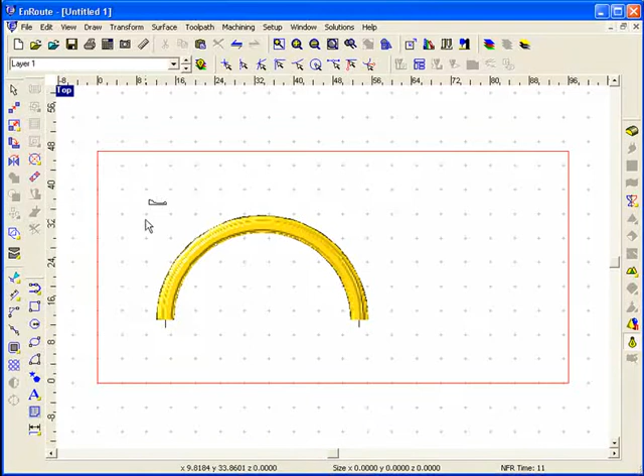In this movie, we're going to show how to toolpath the previously created molding. We're going to start off by getting rid of these 2D contours, which you don't need anymore. And we're going to take this relief and move it to the lower left-hand corner of the plate by hitting the Control button and the 1 from the number pad to the right of the keyboard.

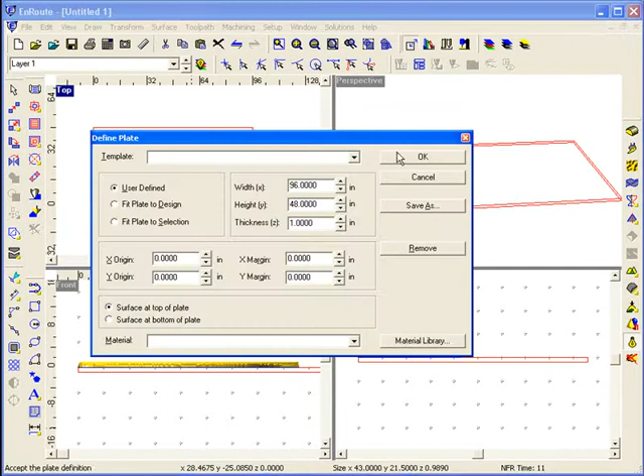When we created this relief, it was resting on top of the material, so I'll first of all select it and see that it's 0.9890 inches, and my material thickness has been set to 1 inch, so I know this relief will fit inside the plate. I'm going to come here to the Align Reliefs tool and move it inside the plate.

Now I'll create a toolpath, and because there's a little bit of material here to be removed, I'm going to do two different toolpaths. One will be a rough pass, and the other will create the actual surface. In both cases, I'm going to use the Island Fill toolpath because they'll be more efficient.

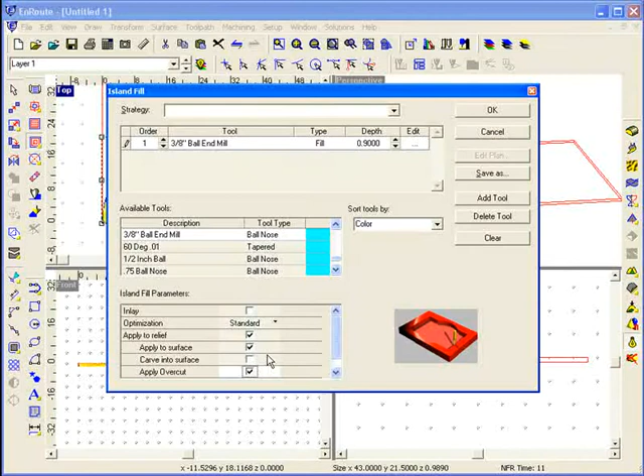I'm going to come here and select the tool I want to use, and in this case I'll use a 3/8 inch end mill, or I could use a 3/8 inch ball nose tool as well. I might use a ball nose tool in this place. So we'll choose a 3/8 ball end mill, and we'll put a depth of 0.9 inches. So we're not going quite all the way to the bottom of the material, and we'll do an overcut here and allow this to travel 0.2 inches past the edge of the part.

I'll also decide the overlap and the feed rates here by assigning these values, and we'll keep this an overlap of 50 and assign a feed rate of 300 inches per minute. Now I can hit the OK button, and we'll see that this toolpath is going to be created.

Now I might want to do a little bit more detailed tool with a higher overlap to give a little better overall appearance. So this time I'm going to choose a little smaller tool, a 3/16 tool, and I will go all the way down to the desired depth. And I won't need to go quite so much past the edge here, so we'll say 0.09.

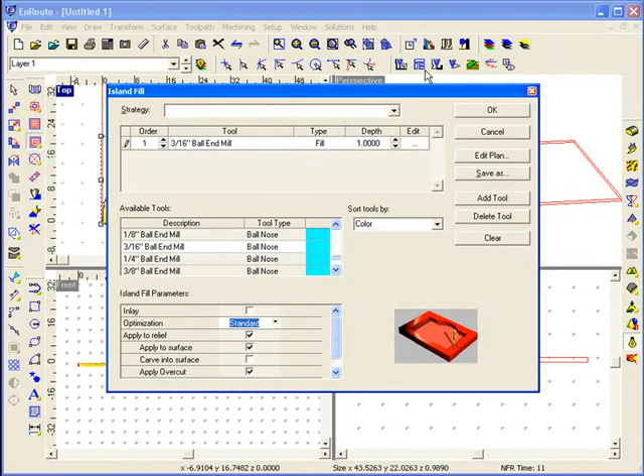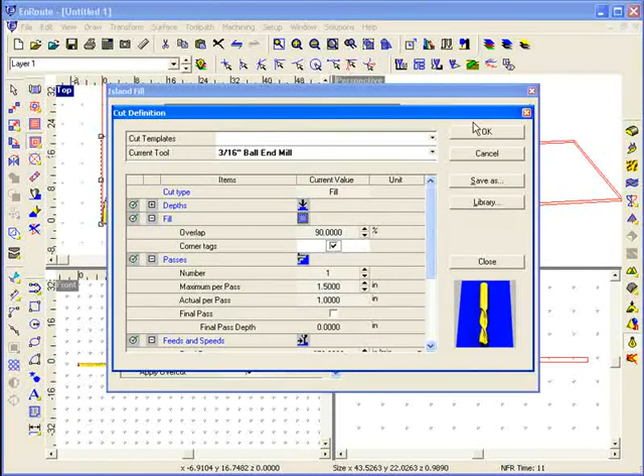And I'm going to put the feed rates in as well. Now I would want to increase my overlap in this case to be able to get a nice smooth part. So we'll go to the fill and change the overlap to 90% and hit OK. When it comes time to cutting this part out, I can treat it as a regular 2D shape and just apply a router offset to it.

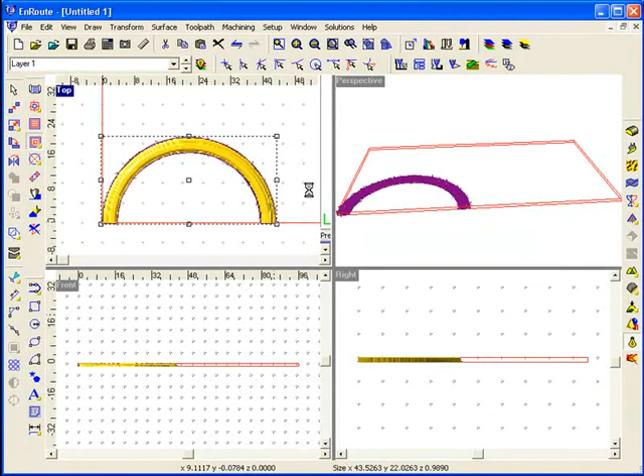Because we're using an island fill, it's going to travel the same direction as the part and take the longest sweeping motions to help reduce the cut time. Now that the toolpath has been created, I can zoom into the top view and take a closer look at it. And we'll go up here to the zoom toolbar, and we can see that we have two different toolpaths, one which will be a rough pass and the other creating a nice smooth finish.

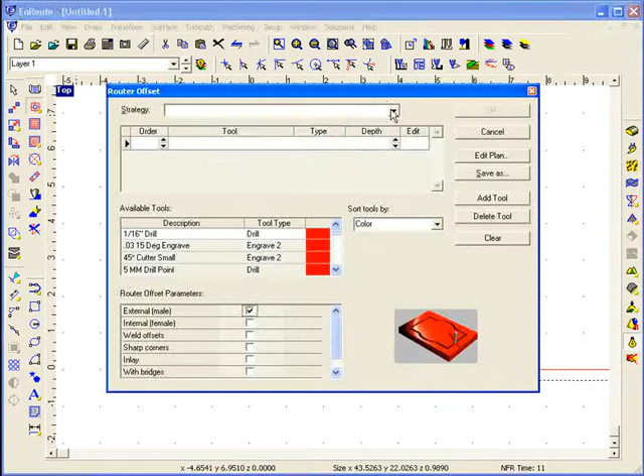And as I said, we can treat this as a 2D cutout in terms of doing a cutout of this part. So this is how we would take the toolpath provided and do a cutout on this. And now because this is based upon a 2D object, we could actually take this part and do multiple parts of it. And we're going to select this part and move this off the plate.

First of all, let's come here to the view menu and turn off the toolpath direction, to make this part a little faster to redraw. And now we're going to come here to the nesting tool, and we can actually create multiples of this by holding down on the nesting tool. Going to nest multiples.

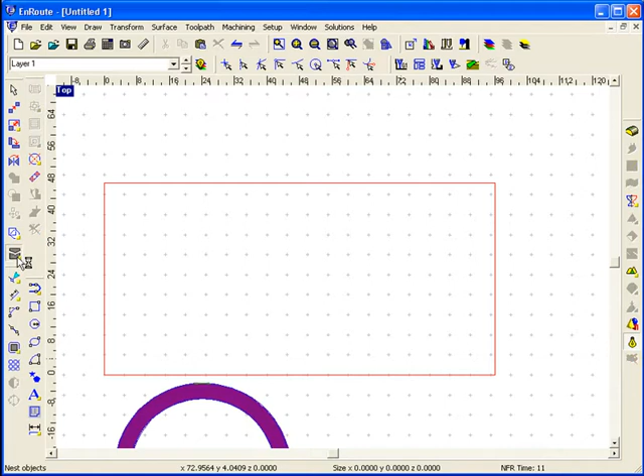We'll select this part. And let's try and fit 15 of these on the screen. We can determine our gap between the parts, how much rotation we would allow. We'll say up to a 5-degree rotation, and hit the OK button.

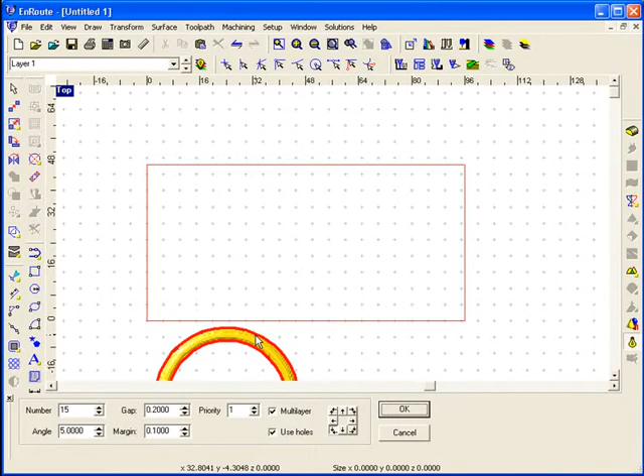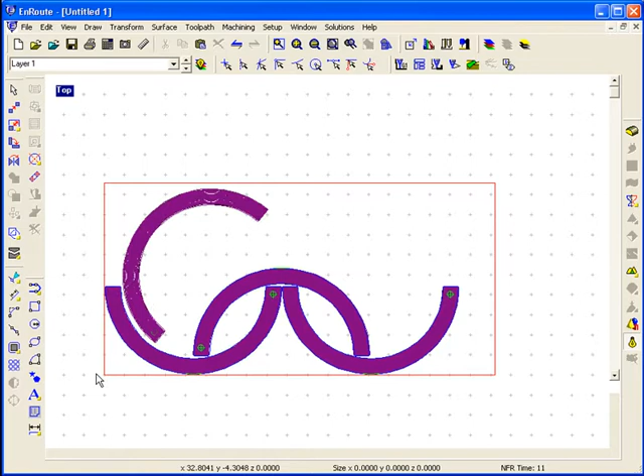And any remaining parts that won't fit on this sheet would be put on an additional sheet. And you could change the nesting parameters and try and fit as many in here as possible. So this has been a conclusion of how to toolpath and create multiple parts of the 3D molding.